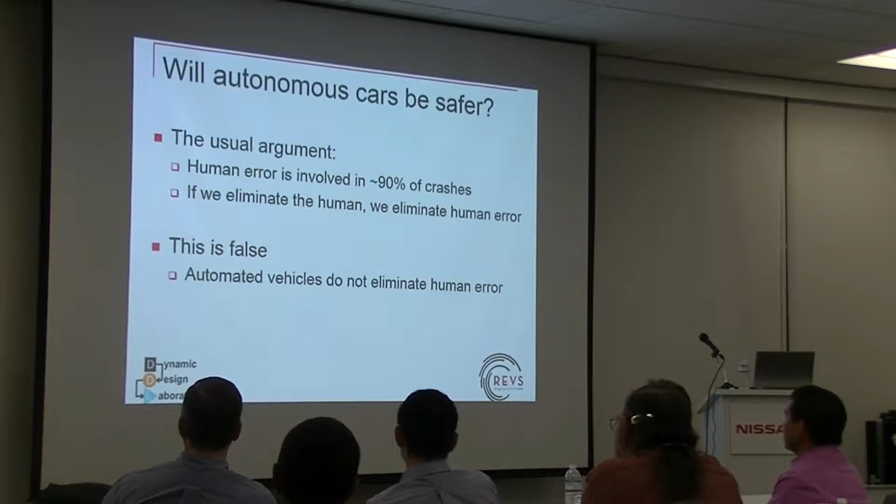It's amazing how many newspaper articles make this claim, and I think this is absolutely false. If I accomplish nothing else this year, I would love to reframe this argument, because autonomous vehicles do not eliminate human error at all. All they do is shift it, from the driver to the program.

Now, that's a really good shift in many cases. How many of you have been driving and thought, I would love to hit the rewind button, go back 10 or 15 seconds and behave differently? How many of us would like to sit and think about our most stressful driving situations at a desk instead of behind the wheel, and game that out? So there are a lot of advantages to shifting from driving error to programming error.

But it's a big challenge. What will programmers have to handle? All manner of things. What about kids running out from a vehicle with very little warning? Maybe you've got a ball rolling out, and you can use that to predict, but you have to think about the things we intuit: a ball must be followed by a child. Perfectly logical, all of us would think it, but are we going to think about it when we're programming?

What about other things? In Japan, there are difficult pedestrian identification problems, like at Shibuya Station. As we think about things used internationally, pedestrian detection and avoidance is a huge issue. And that's not only international—there are difficult things you might find in San Francisco too. I'm programming the autonomous vehicle to understand cars, bicycles, pedestrians...

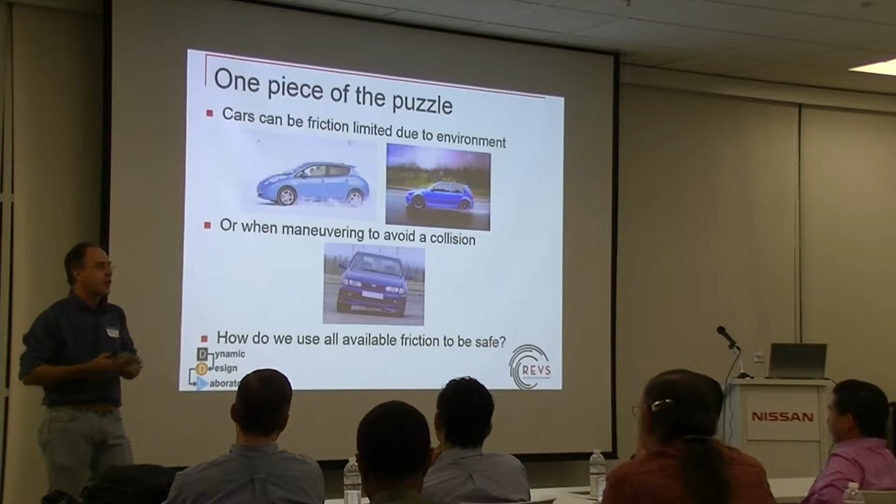So this is really a question that we've been asking. One class of accidents, clearly not everything, but one class of accidents involves needing to take all of the friction between the tire and the road and maneuver the vehicle safely out of harm's way.

Well, there's a group of people who do this routinely, who are extremely good at it, and these are race car drivers. Now, they use all of the available friction to go fast, but as they say in racing, if you want to finish first you have to finish. Collision avoidance is actually a very important part of racing.

Now, they are trying to push the car out to the very limits of friction for speed. We want to actually push it out to the very limits of friction to be safe, to basically execute any maneuver that would avoid an accident if the laws of physics say that maneuver is possible. So we started to ask, how do they do this and what can we learn?

Now, I've been looking at vehicle dynamics for quite some time, I guess the dark ages, as Martin pointed out. And so this was a really interesting problem to me. So we started a project with Audi to see if we could race as well as the very best human drivers. And if we could race as well as the best human drivers, could this teach us how to design safer cars? Now, this was something that appealed to me because of my background in this area.

So for those of you who aren't familiar with my background, we're going to give a quick rundown so you understand where I was coming from on this project.

I started out getting my PhD at UC Berkeley working with the California PATH program, where I had the opportunity to work with Steve Shladover, who I think you heard from a couple months ago. So we were doing platooning of Lincoln Town Cars down in San Diego, and I did the throttle and brake control for these vehicles. I then went on to work for Daimler-Benz and Freightliner and got to work on projects like this. I did multi-body dynamics and vehicle dynamics for large, heavy trucks like this airport rescue vehicle.

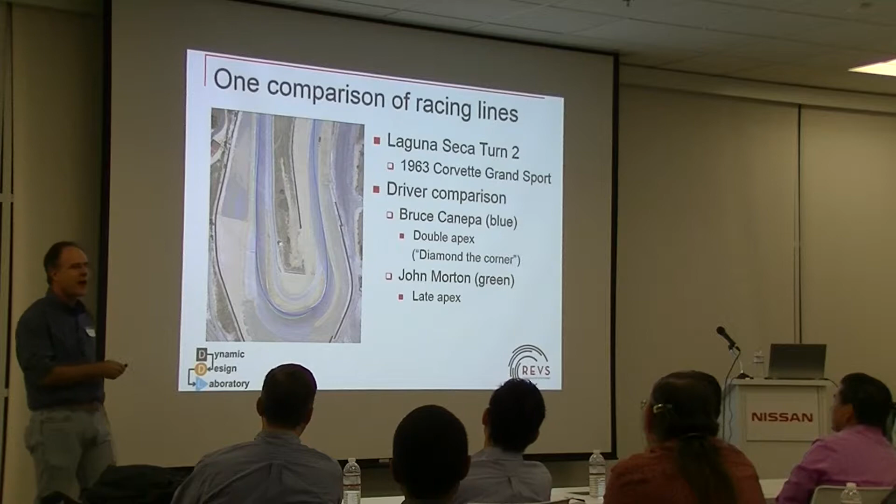Now these guys have a very different approach to this corner. What Bruce does is known as a double apex: he comes in and steers in to hit this point of the turn, goes a little wide, steers in and hits this other point of the turn, and goes out. John does what's known as a late apex: he drives out, goes a little wide, then hits the apex of the turn right on exit, and does this very cleanly.

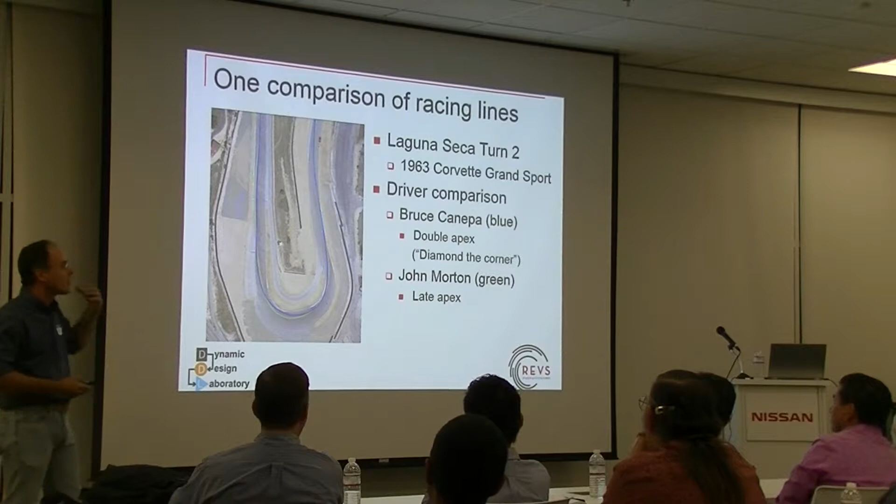Now these are lines that are both recorded in a 1963 Corvette Grand Sport that we tested just this past August. I want to show you what that looks like inside. First we're going to watch Bruce, and you're going to watch the steering wheel, and you'll see when he actually literally goes towards the apex twice.

So what you'll look for is Bruce doing two deliberate steer-ins. John will tend to go around the corner and steer in here.

All right, so here's Bruce. He goes in—boom, you see the steering as he finds that apex. Now he swings a little wide, hits it again, and out he goes onto the straight.

Okay, here's John. He goes in, you see a little bit deeper into the turn, you see him away from the center. He hits it right there on the apex and then straightens out onto the track on his way out.

Well, we thought this is great because we've got two incredibly good drivers here. We can actually compare their lap times and see who's got the better strategy around the track. So we compared their lap times, both from their very best laps, with no cars in front or behind them, so these were pretty clean laps. When we broke it down, the two lap times were within 4 hundredths of a second of each other.

Now, stop and think about that for a moment. How many of you have actually programmed a simulation, a mathematical model, anything you did mathematically that you tried to represent the real world? Anybody? Did everybody do that? Yeah, okay. How many of you got within 0.04% of the correct answer? Not a lot of hands.

When we do these sorts of things, we make small angle approximations. Usually we're thinking 10% differences, but these guys are within 0.04% of each other.

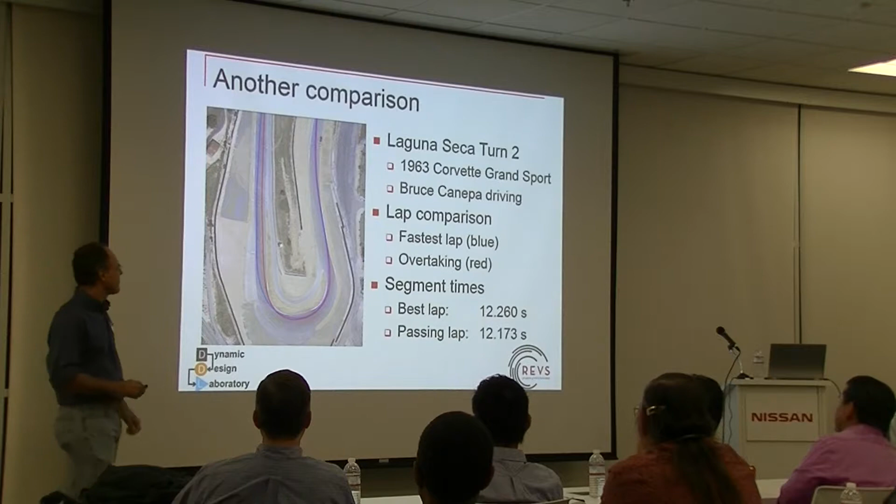So let's take a look at that. How do those segment times compare? Well, in his best lap, he got through this segment at 12.26 seconds. On his passing lap, he was faster.

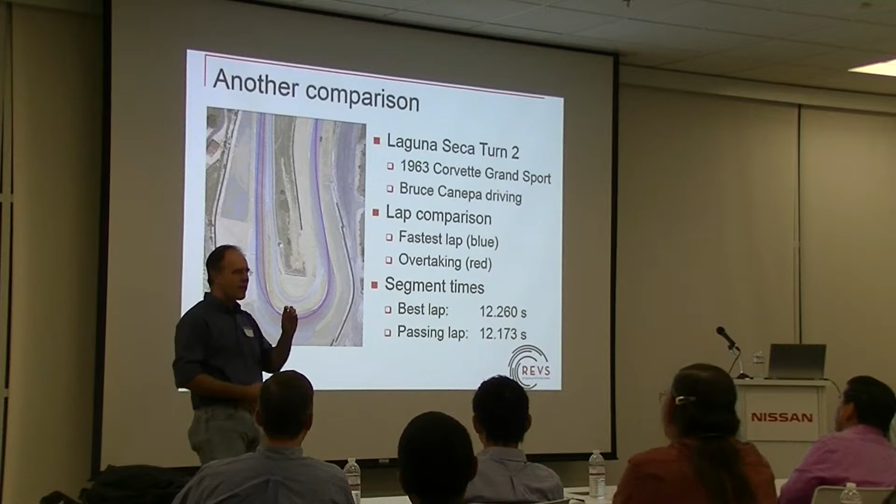Okay, now wait a minute. That's a little bit mind-blowing because clearly we know you need to swing to the outside of the track in order to be fast, but he found another line that goes on the inside.

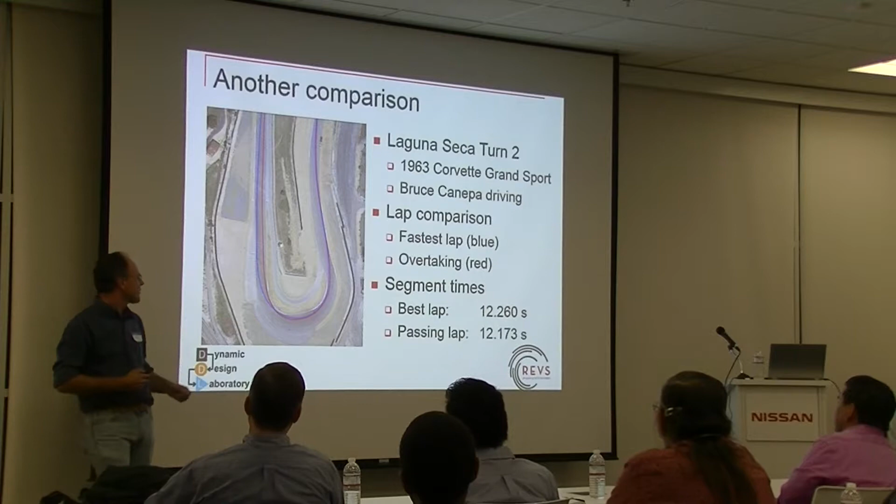If you look at it, you can break this down and say there's a couple of things going on. First of all, he pushed it much harder around the corner here - if he had been in a long race, he would have worn the tires out more. But second, he was a little bit slower coming out of this corner.

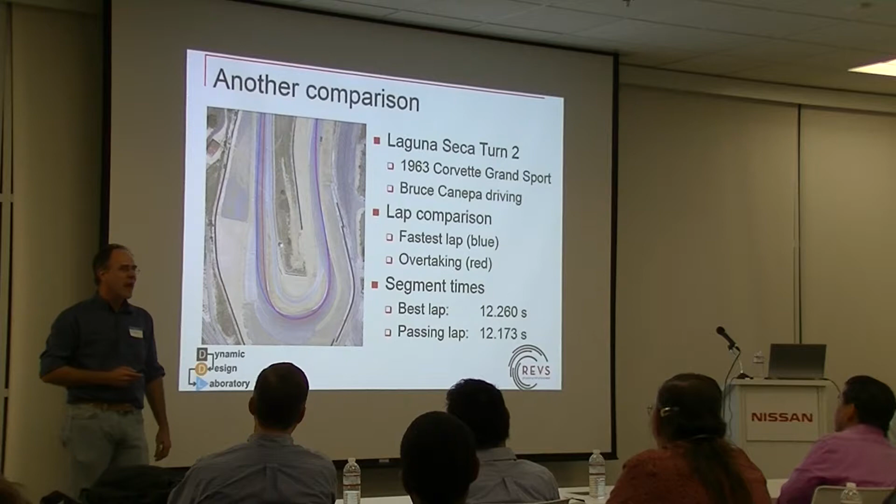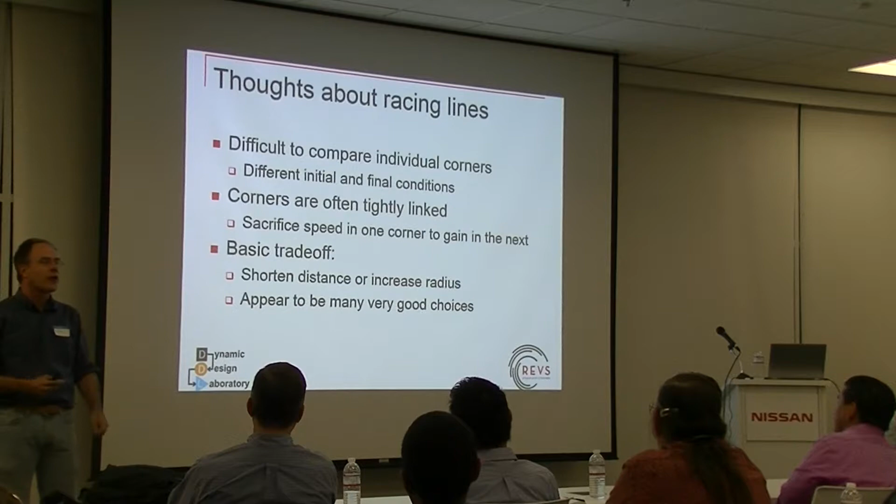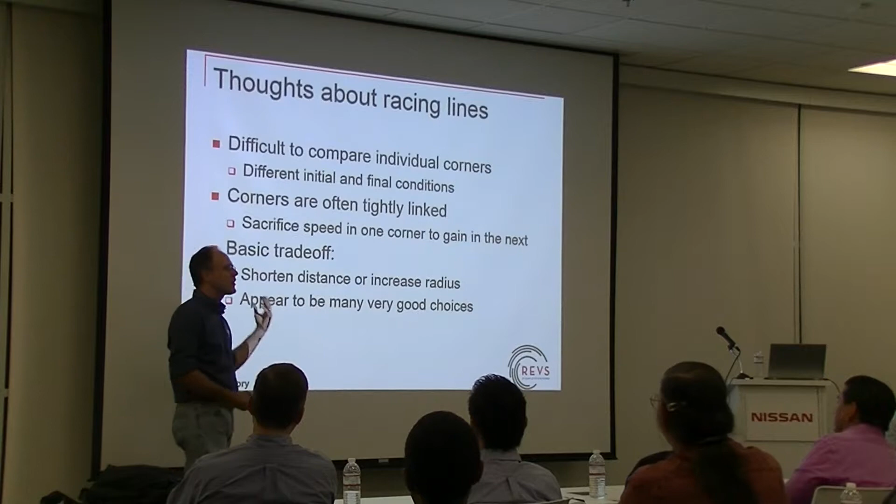So the corners are very tightly linked, and sacrificing speed in one corner to gain in the next makes sense. But as we set up the optimizer, there was something that really kind of fell out of this - that in general you have a trade-off in how you go around the corner.

I can go to a larger radius, which lets me go faster, or I can actually take a shorter path more slowly. But if you think about it, that sort of starts to offset, and so it turns out that you can find a lot of good ways around a racetrack.

Now, that's not to say that any arbitrary path is going to be fast, quite the opposite - but there's more than one way to be fast around the path. So our question really became not how do we find the best, but can we find one of these?

And the man who helped us out on this is Piero Taruffi. Piero Taruffi is my new hero.

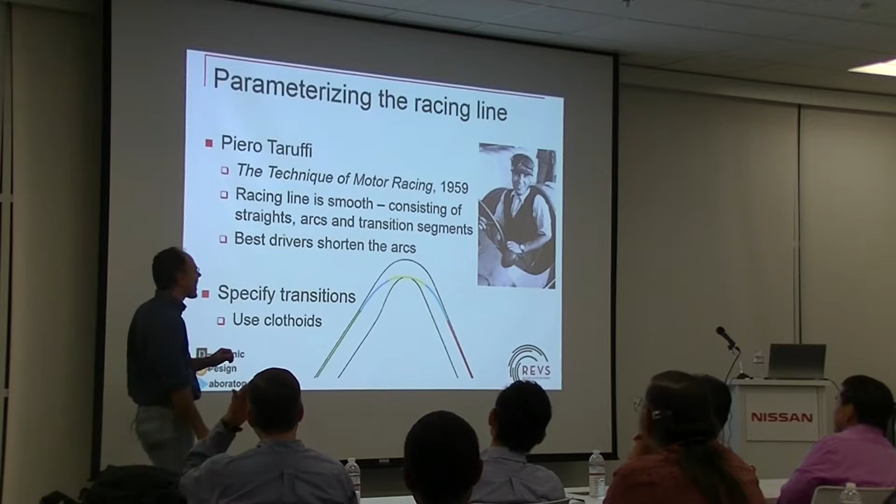Piero Taruffi had a doctorate in engineering from the University of Rome and was a winning Grand Prix driver. He won the Mille Miglia in Italy and was just all around a cool guy who I wish was here to join our meetup, because I'm sure he would.

He might even come to your parties in high school, Greg. I don't know, it seemed like he was a party kind of guy. He liked all sorts of sports, like motor racing.

He wrote this great book in 1959 where he broke down all these corners and said the racing line is smooth. So we can think about it really in simple segments - straights, arcs, and these transition segments, which we interpreted to mean clothoids, things that change linearly with curvature, because they're basically the simplest possible curve.

And so we took Piero Taruffi's ideas and said, well, can we match this to what race car drivers are doing?

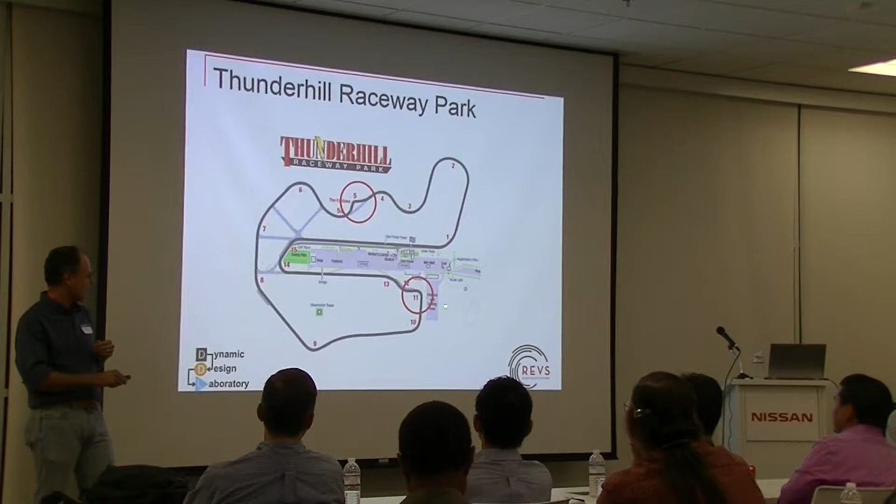So we went up north of here a little bit to Thunderhill Raceway Park, which has some fantastically interesting curves, including turn 5, which is over a hill, and this chicane here, 11, 12, and 13. We had the president of the track take our Audi around, and this is a comparison of his line.

I gotta get you hitting me again there, Greg, thanks.

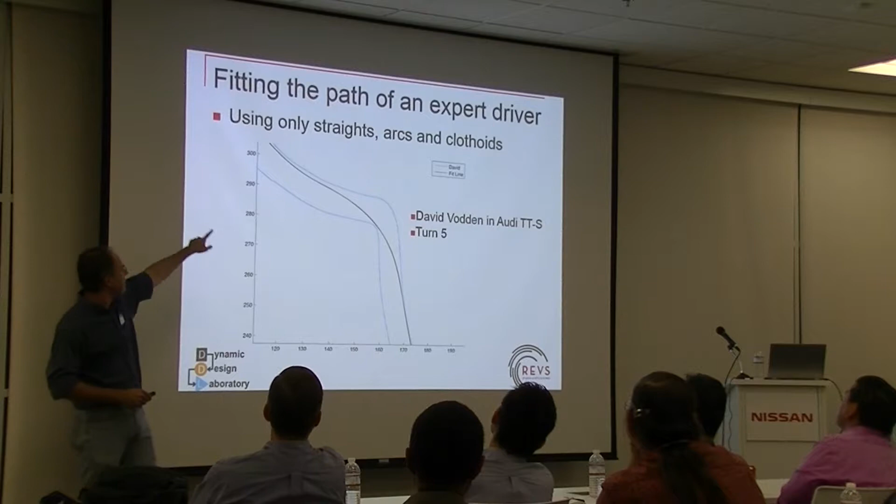His line and the line taken by our fitting algorithm with clothoids. Turns out you can go around the entire track with no more than about 20 centimeters of error, and you can reduce 54,000 points, in other words, 27,000 XY data locations, to about 112 straights, clothoids, or arcs. We can take the path that the race car driver is doing, break it down into these very simple curve shapes, and it represents the track extremely well.

So we thought, well, this is good. If it's not really about finding a single best line, then making this family of curves is likely to give us a reasonably fast line. So we thought, if the racing lines are smooth paths, we can capture this with fairly simple curve shapes, at least within the range of driver variability and other things. If there's many racing lines that seem equivalently fast, based upon what we've seen from skilled race car drivers and what our optimization tells us, then we should be able to find fast lines using the straights, arcs, and clothoids.

So normally this is where I go into the math of this, but it seems like there's probably more interesting things to discuss tonight. I can bring up the math later, but for now, I'm just going to say not only should we be able to find racing lines mathematically, but we can.

So what does it look like at the end of the day? I'm going to show you a comparison between a line around Thunderhill Raceway Park driven by the president of the track and one that we calculated based on these algorithms.

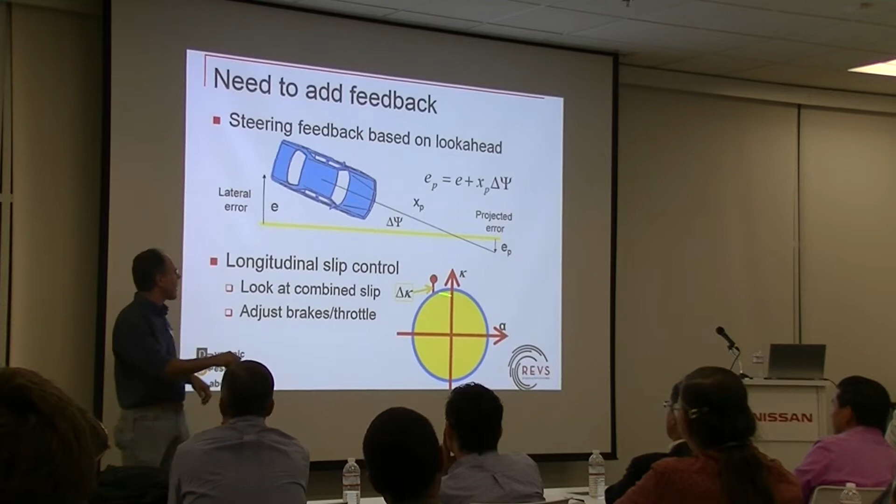Then we actually look at the tires and what the slip characteristics are. If we understand there's a certain amount of force or slip that the tires can handle in the longitudinal and lateral directions, much as you all pantomimed for the overall car, we can monitor what's happening in each tire. And if we see one of these things beginning to lock up or slide out, we can take some corrective action as well.

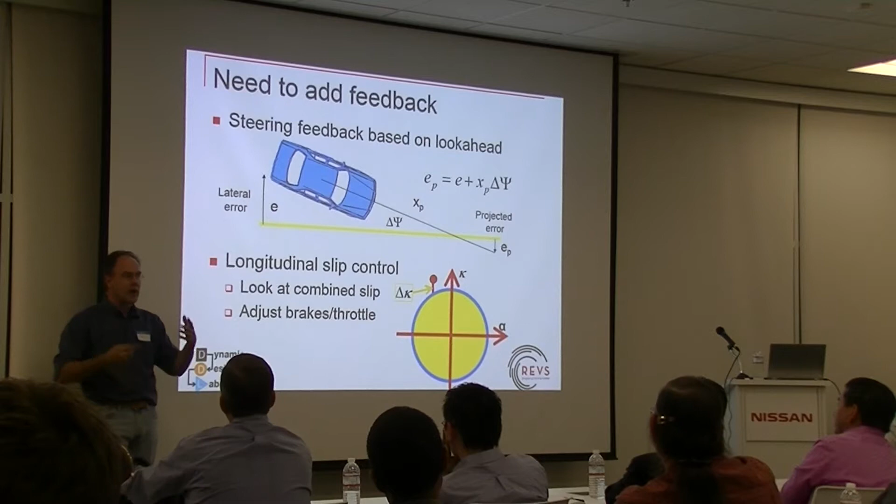So you put this together and you get the following. Here's Shelley out on the track. With the differential GPS, you see we can steer in and do a really good job of bringing it right up to the apex, and out to the edge of the track as well, depending upon how daring the grad students are feeling.

Now you see we come down to the apex again, and if you look inside the car, that looks pretty chill, right? Going along pretty happily, steering as it needs to.

Now we come up to the hill here, and see the car is capable of doing a lot of really excellent work, a combination of braking and steering. The car now has to brake heavily as it goes into the turn, again going right up close to the apex, accelerating down. From the inside, we've got a minor steering twitch to correct, and we're back, tracking the path once again.

We can get up to some pretty decent speeds on the track. This is zooming ahead a little bit as we go up the hill on the far side of the track.

Again, trying to use as much space as possible, which is really important if you want a fast lap time. We get some serious speed, have to brake heavily, turn left, out to the apex, turn right over a blind hill, and then if you watch, the car can find a straight path here, even as the road is wandering. So this is where it makes up some of its time on the track.

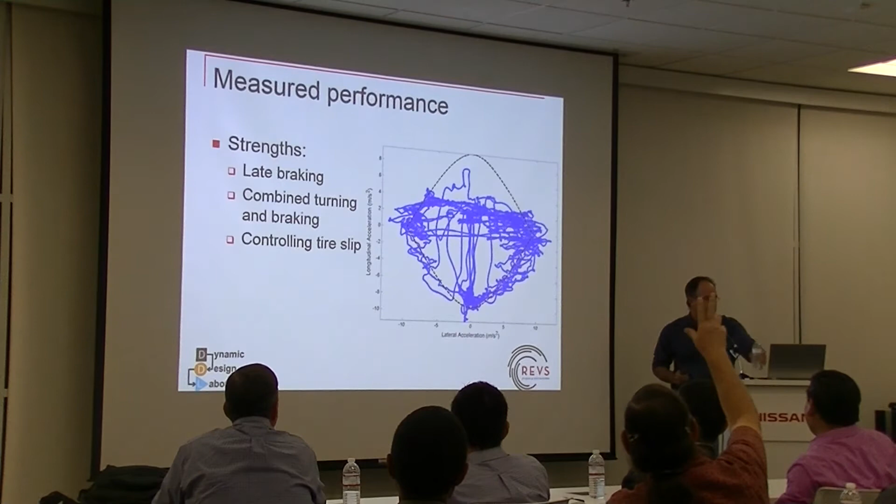Question: did you ever have a situation where you ran off the track? Yes.

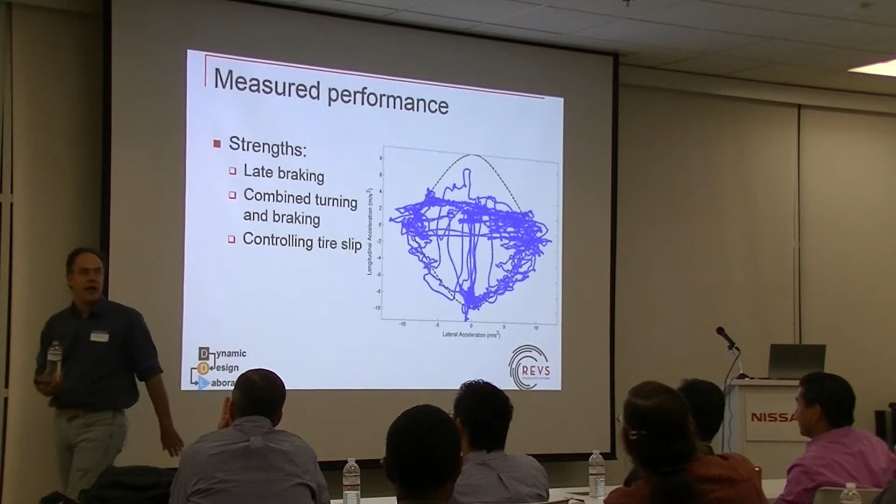Quite honestly, we are really pushing it right up to the edge of the limits of what it can do. And so there have been times, particularly when it's been raining up there, where you're testing something and it just goes a little bit too far.

One of the situations I thought was most interesting was a time I actually decided to take control of the car just as it was going to begin its braking at the top of the hill. Now, I've spent many hours in this car with one hand hovering above the steering wheel and the other hand over the big red button. I took control of that car and immediately got on the brakes, but immediately wasn't fast enough. So the car ended up going off the track far worse than it would have if I had just let it steer around. There's kind of some interesting lessons here as we think about takeover scenarios.

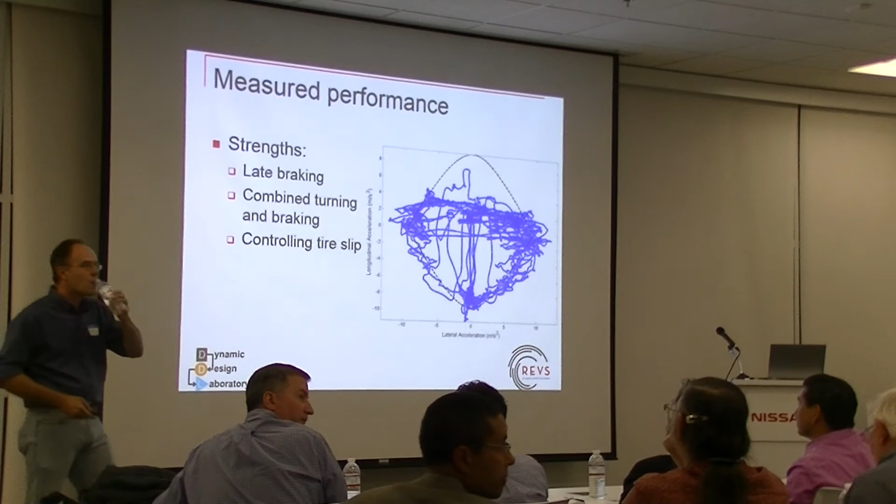Question: do you need to detect those kinds of out-of-boundary situations, like where you need to kick in with some specific recovery algorithms, or is it all handled by the same model?

So yes and yes. Yes, we need to do that, and I'm going to talk about that in two slides—it's sort of my finishing thought. I know that wasn't in what you saw just now. So this was simply just steering back with the simple feedback laws.

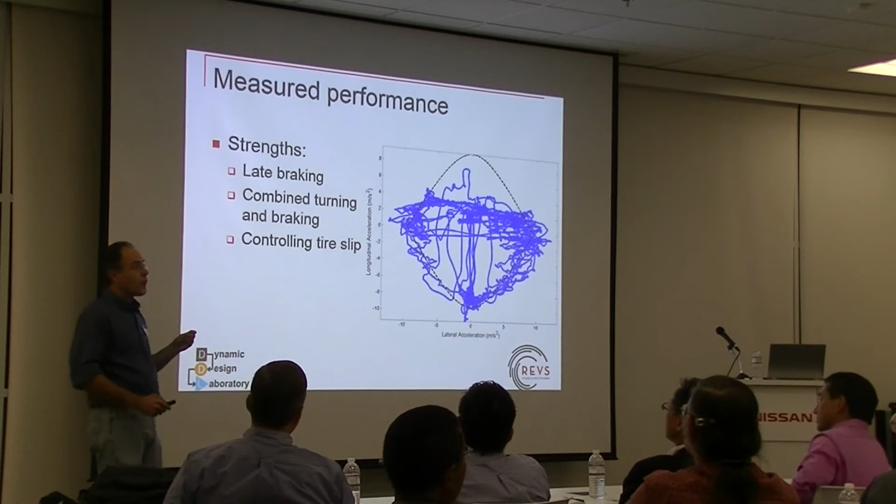Question: are your maps 2D or 3D, since you have a lot of hills in there? Yes, we have grade and bank that vary along the track as well. I'll say there's probably some significant room for improvement in how we're handling that, but the car does know, over the course of the racing line, an approximation of the grade and bank of the track. This becomes extremely important when you have these large hills and downhill situations.

Do you do any calibrations before the racetrack for the road conditions? Yeah, we do. We try to be as physically driven as possible, so we don't like to go out and tune too many different gains—we try to do everything as much as possible with physical parameters. But any of you who've ever done racing know your tire properties change tremendously as your tires wear and as the temperature of the track changes. Those of you who've been at Thunderhill know you can have a nice 75 degrees in the morning and be dealing with 110 in the afternoon—that's quite different in terms of tire parameters. So one of the things we do is a ramp steer test to get some basic characterization of the tires as a baseline, but then the car can vary that as it goes. So we do calibration on that.

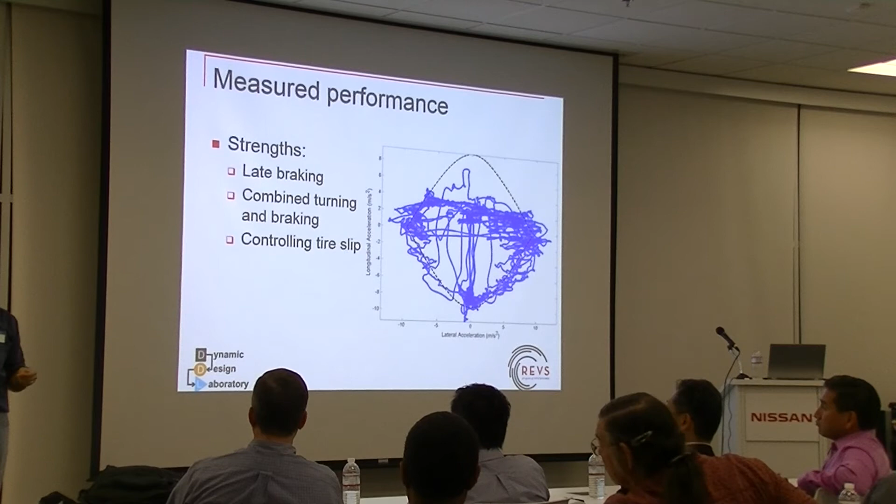Are you using a constant estimation of mean friction for the entire track, or are you doing it online? Yes and no, depending upon what we're doing. We do have the capability of estimating it, and I'll motivate that in a moment. In the particular video you saw with the recovery, we were not doing online estimation of that.

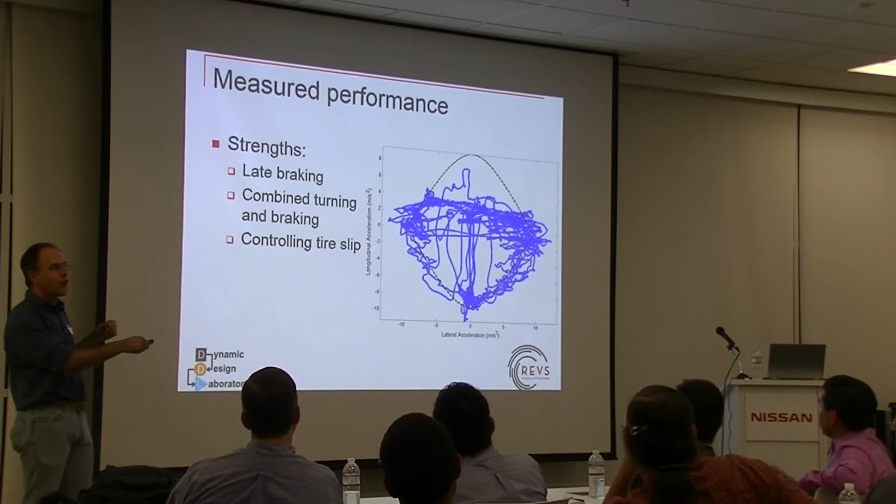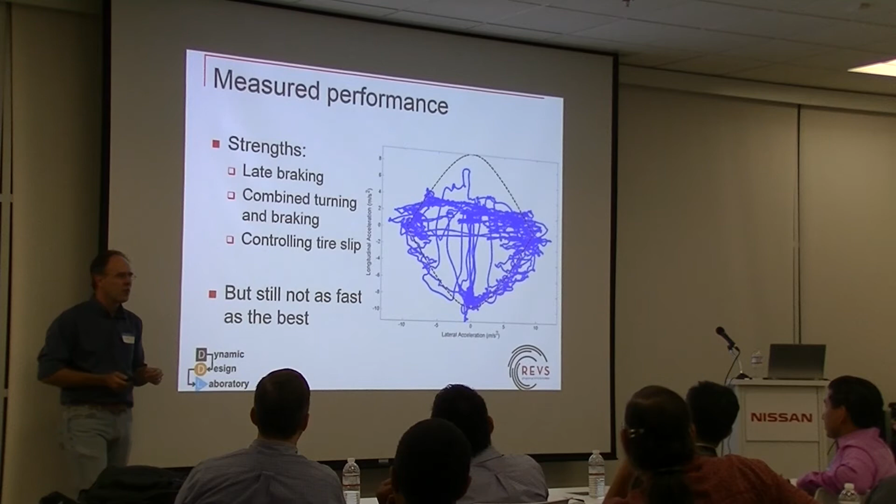This is the friction circle that you all drove so well, standing up. Our car does a really nice job going through the accelerating, the braking, and along the edges of this. This is really the engine limit, which varies according to speed, because it's essentially a power limit. We do a great job of controlling tire slip, and yet we're still not as fast as the president of the track. We're getting there, but we're still a few seconds behind him.

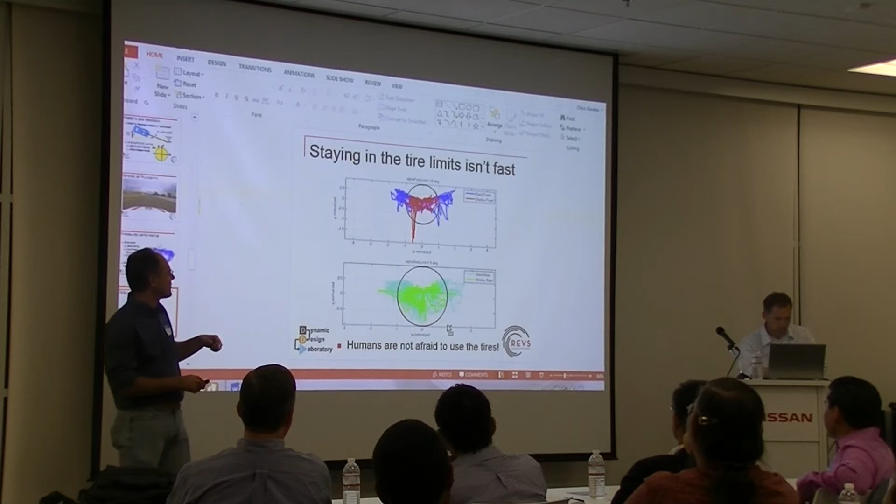That'll make it even more exciting. Online, I think if you just go down to the... yeah. Perfect. Thanks, Greg.

So we do a nice job of respecting the limits of the tires, and the human driver doesn't. The human driver is actually content to go way out here in front, saturate the tire tremendously to make sure they're never below the limits. So not only is the human driver able to get a racing line about as good as we can calculate from optimization, they don't obey the slip circle limits, they don't stay within the lines. Our great controller, getting 80-90% of the slip circle, is not fast. It's slow, because we're leaving that little bit on the table.

So it turns out it's not that simple to just say, well, let us saturate the front tires, because then you're plowing through the turn. It turns out we don't know exactly what the friction limit is, and many of your questions have brought this up. How do you know what mu really is? It changes with tire temperature and track pressure, and drivers are amazing at sensing this.

I talked with Gil de Ferran, who won the Indy 500, and he's done a lot of tire testing. I asked him, how many laps does it take you when you put on a brand new set of tires you've never driven before, a new formulation, to get up to the absolute limits of the car? He looked at me and said, laps? Chris, I wouldn't have a job if it took me laps. Two turns. Two turns and you're up. You've got to have a local understanding of how everything changes with the tire. So you get two turns and you're off and running at the limits of the car.

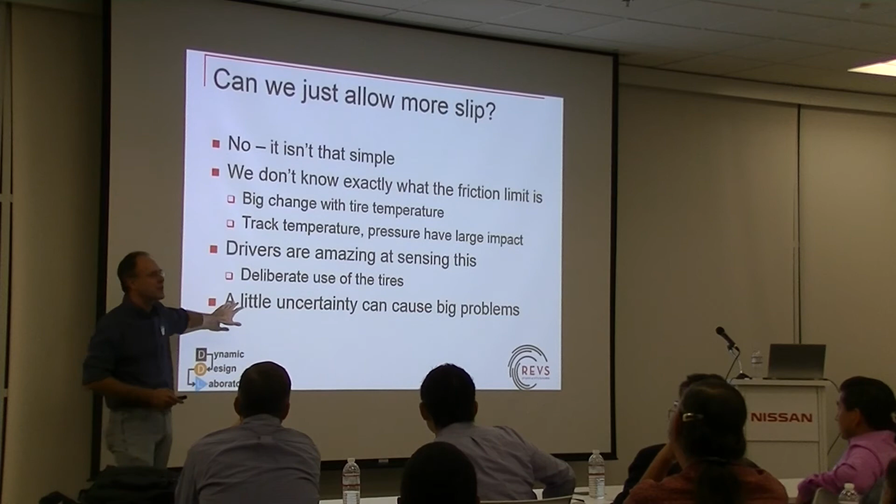If I have misestimated friction, if I'm trying to drive up to the limits, and I've misestimated this by 3%—which is awesome if I can get it within 3%—I'm off the track. I'm not only missing the apex, I'm missing the pavement entirely.

So it turns out that this whole entry problem, this idea of braking before I get into a turn, is a very stiff mathematical problem. We've got basically two options: one is to go in conservatively, which is where we thought we could do, but that's not going to make us fast.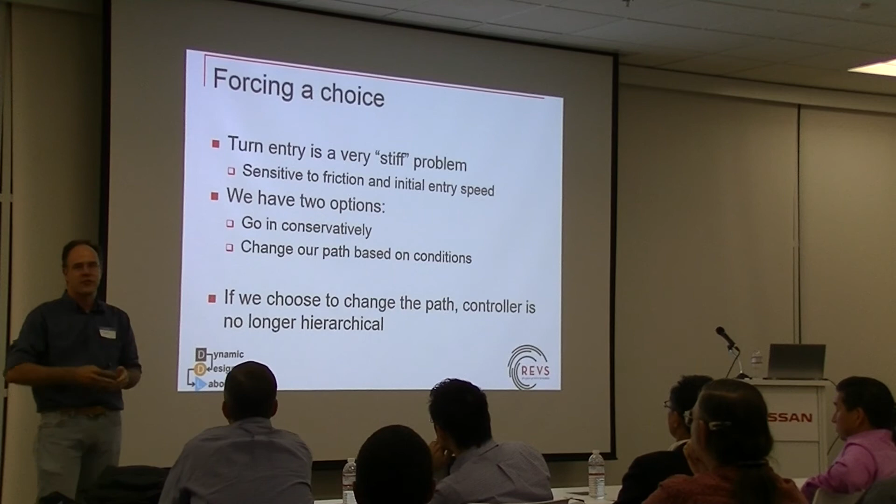The other option is to change our path based on conditions. But if we do that, our controller really is no longer hierarchical. Many people who look at autonomous vehicles say, well, we do path planning, and then we go and do things with a low-level controller. If you try to do this in that fashion, good luck—because the path planner says do this, and the low-level controller goes, no friction, you can't do that.

So several things we've learned from this are very interesting for developing autonomous vehicles. Much of the path planning for autonomous vehicles comes out of the computer science field, where you'll generally think of the world as a grid and say, let's connect the dots and then smooth it. It turns out that if you start with this connect-the-dots-and-smooth-it approach, you rarely end up with one of these smooth paths that race car drivers generate. There are many fast ways around a racetrack, but this is not the way to find one.

So the whole approach of working around the limits, getting up to the limits of the car, is to be smooth and then fit that smooth path around the obstacles, as opposed to thinking about something that fits around the obstacles and then smoothing it.

So clearly there's a need to sense friction. We've got several approaches to doing this, and then to adapt the path according to new information, so that the controller can go into a maneuver, realize it doesn't have as much friction as it thought, and very quickly replan the maneuver. It turns out that driving the path is the challenge—finding the path is really not that bad. Finding a path around a racetrack is not the problem that we thought it was.

So how do we use all of this? I want to take this from just a pure racing setting and show how it relates to day-to-day life. Let's look at a lane change maneuver—an emergency lane change where we're coming in at highway speeds and suddenly need to change lanes to get around the car. We want to brake and corner to get around this, then accelerate again so we're up to the speed of traffic in the other lane.

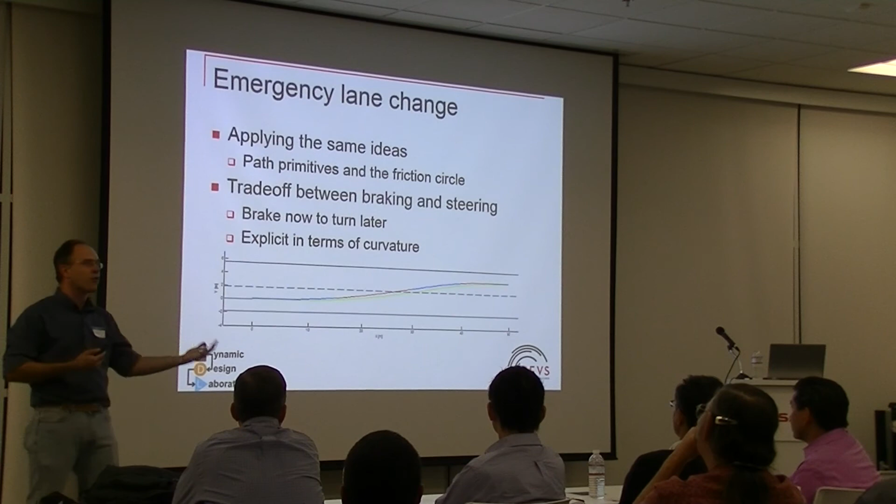It's much, much cooler. Okay, so my goal here has been to hopefully convince you that by looking at the world's best drivers, we can learn a lot that helps us with autonomous vehicles. First of all, I think a measure of respect is in order—humans can be amazing drivers, truly extraordinary in how they get to the limits of the car's capability. We really want to take lessons from them. More than one good trajectory exists; we don't necessarily have to get hung up on the optimal trajectory.